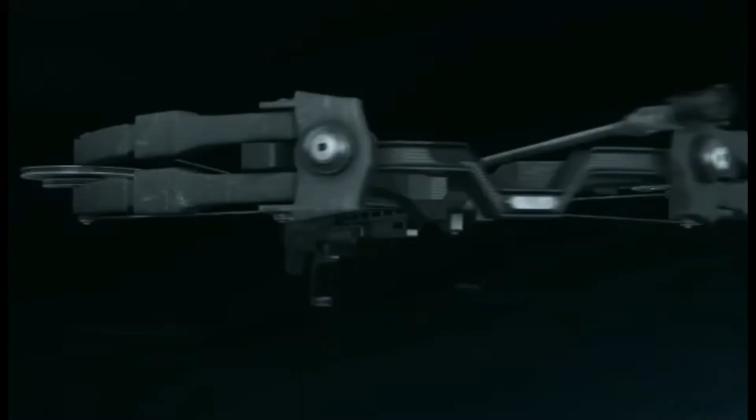In this tutorial we are going to be generating the NC codes required for VMS project 10. The programming has already been done, so we are going to go through each of these operations, beginning with the machine definition. We are using a TITAN-86L as CNC controller coordinate system. We got MAC 1 and MAC 2. So MAC 1 is actually at the main spindle and MAC 2 is at the back spindle.

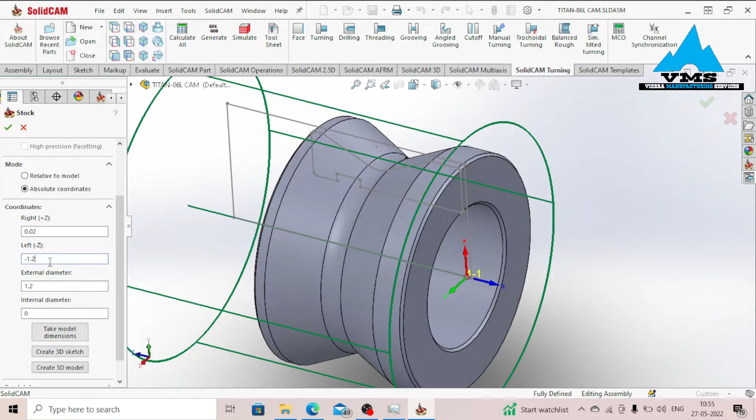Stock definition. Of course, adding some extra material of 0.02 for the facing at the main spindle and equally some extra material required for clamping. We go for the green check. Target. As our target, we are taking the 3D model. Go for the green check.

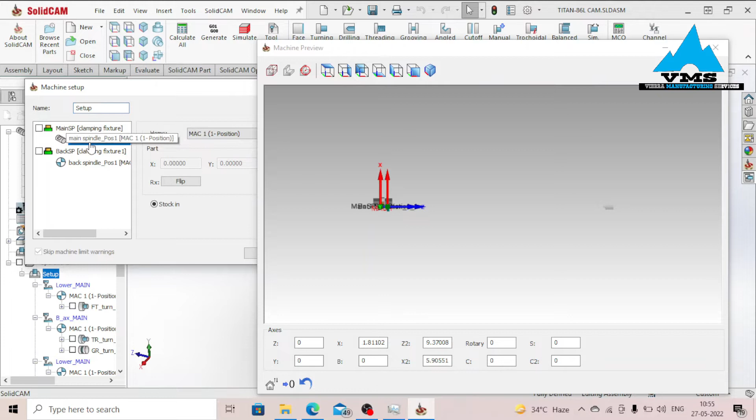So, looking upon the setup, edit setup, machine preview, by selecting main spindle. Now, we are at the main spindle. So currently the jaw is properly seated. I like this position. In case your jaw is not properly seated, you want to make sure that you actually highlight this Z-axis. By using the mouse wheel, you just want to move it up and down in order to get the correct location of your jaw. So I'm pretty good with this.

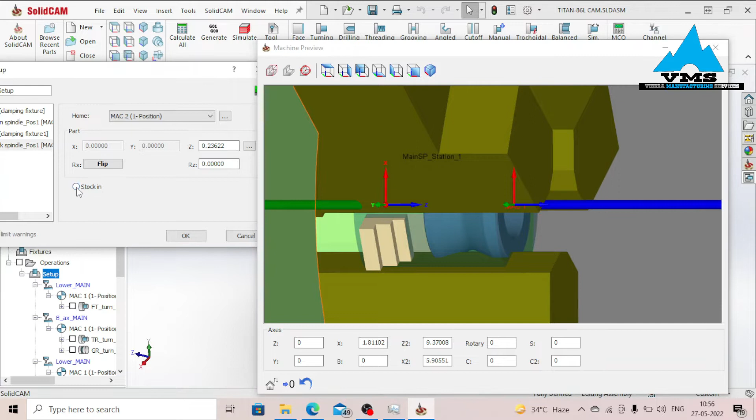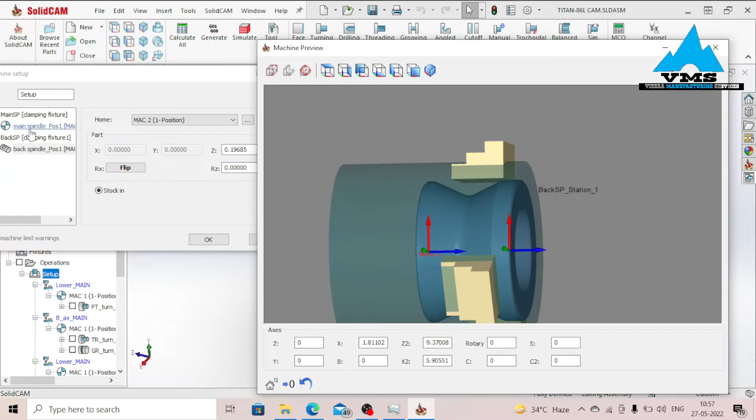Going to the back spindle, select in stock such that the part is going to leave the main spindle and go to the back spindle. Now, going to the back spindle, you just want to highlight Z and move it upward, downward until the jaw actually sits on the part correctly. So I'm pretty good with this. Now, currently the part is in the sub spindle. I do not want to start my operations with the back spindle, so I will just come back under main spindle, making sure that stock should be selected over here, and I go for the green check.

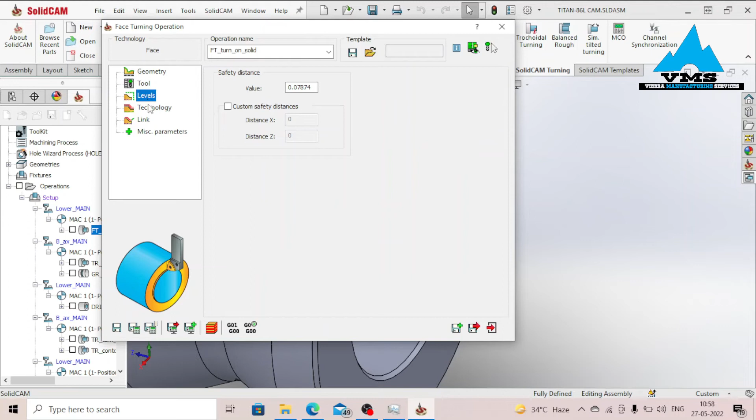Looking at the operation, starting with facing operation for the main spindle, edit operation, show geometry. So we are always selecting this line or this face. Tool. I am using an external cutting tool of angle 35 degrees for my facing. Levels, always safety distance. Technology, I am using a roughing pass and a finishing pass. Looking at the simulation.

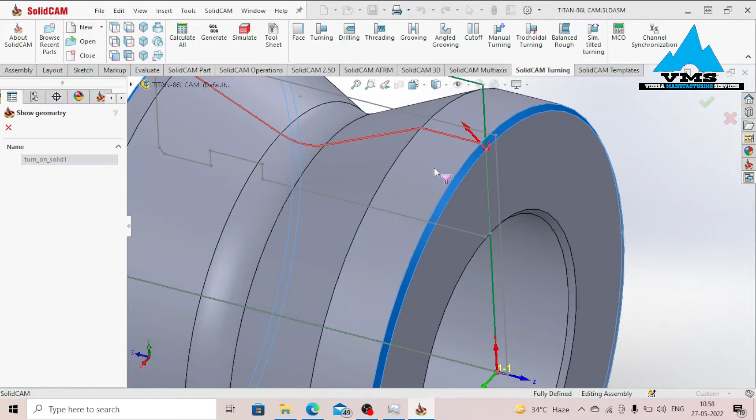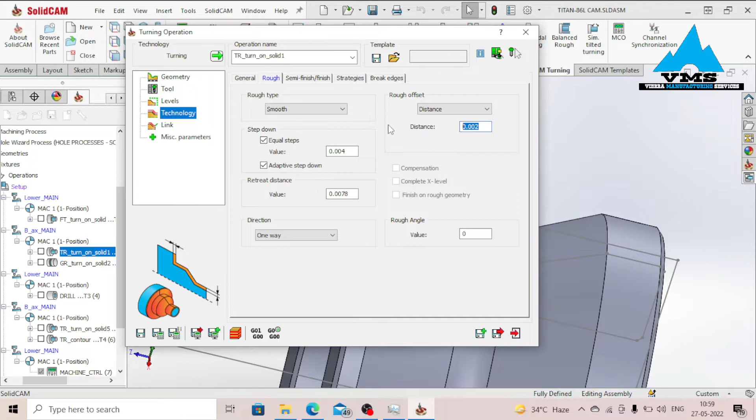So the next operation we want to make is turning operation. Edit, geometry, show. So we are actually turning from the chamfer to the other end of the part. So we are turning the whole part. Tool. I am equally using an external cutting tool, but this time around of 60 degrees. Go for the green check. Technology. I'm using a roughing pass with a semi-finish and a strategy of non-descending. Go for the simulation.

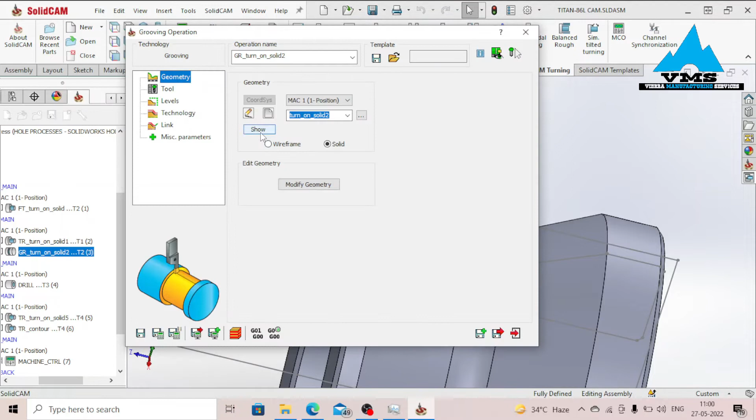Now, the next operation is about this groove over here. Groove operation. Show geometry. For the groove, we begin from this point to this point. As tool, I'm using a groove tool. Levels all fine, technology. Roughing pass and equally a finishing pass. Looking at the simulation.

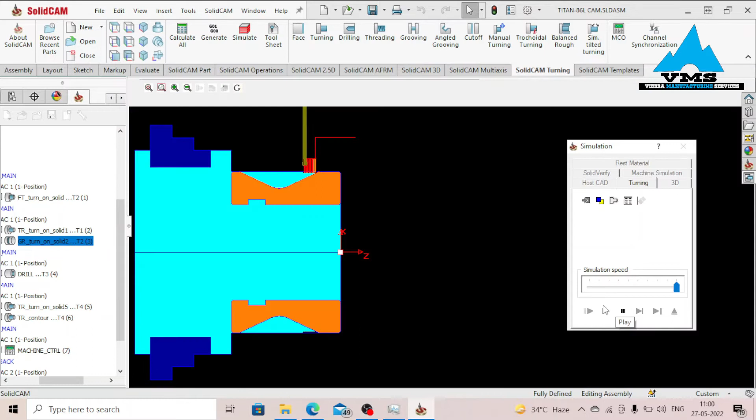Grooving operation done. As next operation, we are going to be making drilling operation for this portion. Now, looking upon our hole, we got a hole of 0.56 inch. So we are going to be using a drilling tool of 0.5 inch. The 0.06 inch remaining, we are going to be using a boring tool in order to make a proper hole finishing. Looking at the drilling operation,

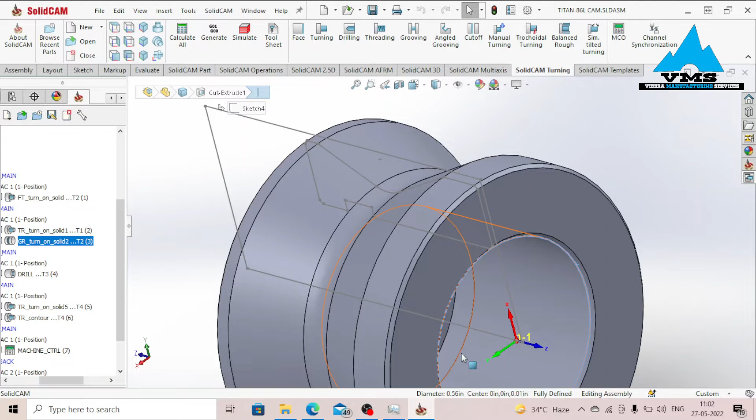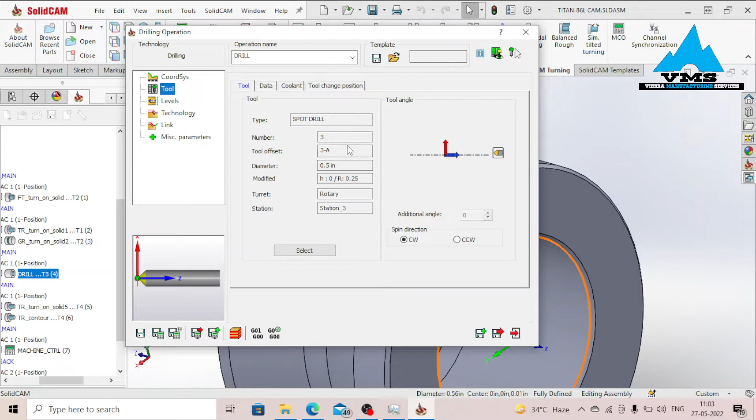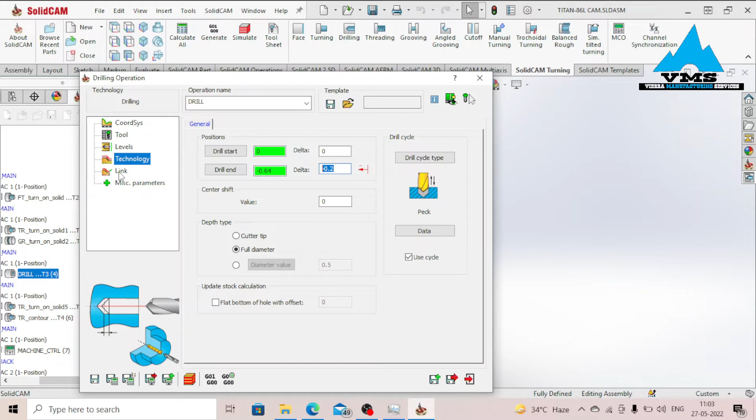coordinate system, we have no coordinate system. Remember that when we are dealing with turning operation or mill-turn operation, we do not define coordinate system for holes because the hole is already at the center. Tool selection, we are using a spot drill of diameter 0.5 inch. Levels, no level. Technology, starting point. Starting point should be this and the drilling end should be this, all through the path with the delta value of minus 0.2. All fine. Looking at the simulation,

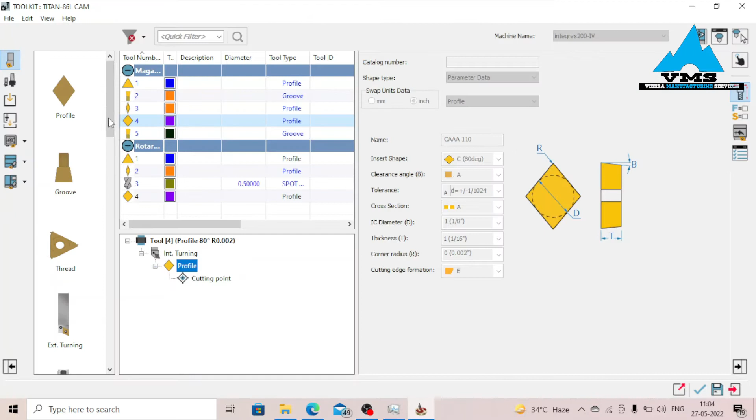for this rest material, we are actually going to be using boring operation. Looking at the geometry, we actually select the inner hole, this line. Tool. We use a boring tool. The boring tool in this case is simply an internal turning tool. Go for the green check, levels, fine, technology. You want to make sure that with mode, you are actually using long internal, roughing pass, and of course a finishing pass with compensation on. Strategy, non-descending. Go for the simulation.

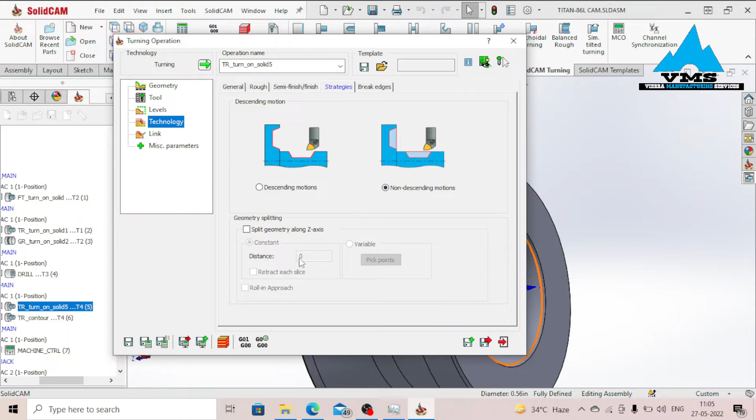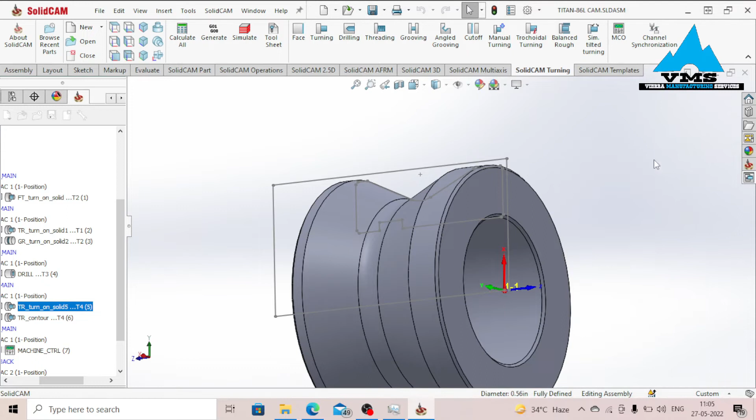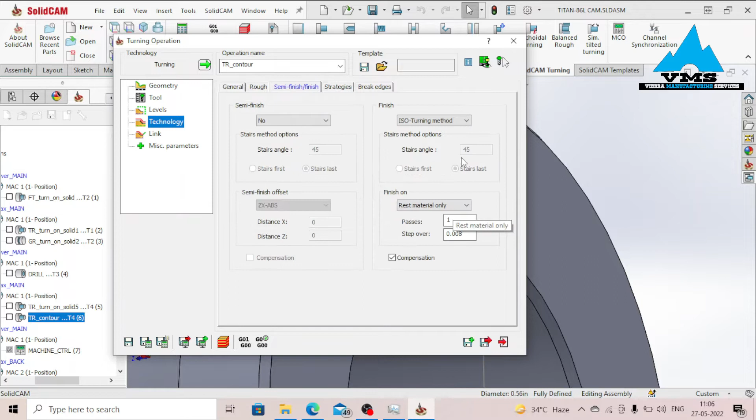So we got this chamfer. If you see, this has not been machined, so we got this chamfer to machine, and now we equally got this hole. I'll be doing this hole when I'll be working with the back spindle. Go for chamfer operation, geometry, show geometry. So we got this edge as our geometry. Tool, the same boring tool, levels all fine, technology, descending should be activated, a roughing pass and a finishing pass. Go for the simulation, chamfer done.

At this point, we are actually done with all our operations on the main spindle. In order to work with the sub spindle, we have to make a part transfer from the main spindle to the sub spindle. Looking at our MCO, edit, machine preview. Looking at the operations in the MCO, first operation, we have the rotatory. This rotatory is actually our sub 2 turret. Since our aim is actually to move the sub spindle to the main spindle, the sub 2 turret and the main 2 turret are out of the way to avoid any collision.

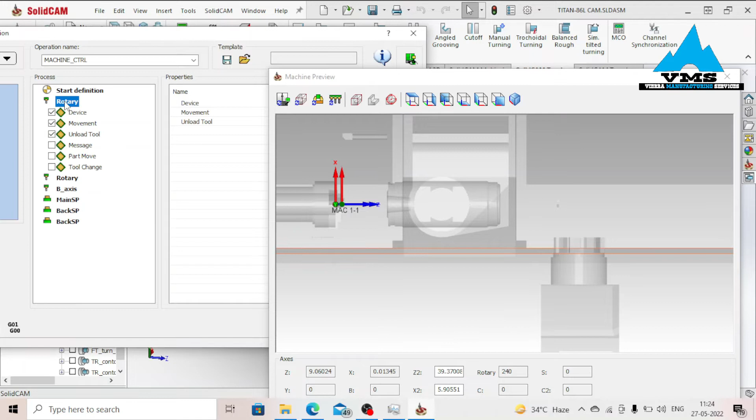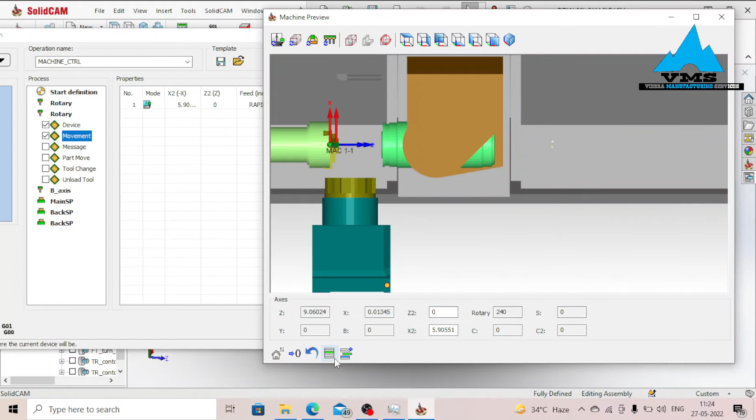Looking upon the rotatory movement, so the sub 2 turret back to home position. Next operation, movement. We are actually telling the sub 2 turret to move out of the way. For this, you just have to come under Z and move it all through with your mouse. Move this way and notice that the most safety position is 0. So when you are done identifying that, you just come under paste axis value and you insert.

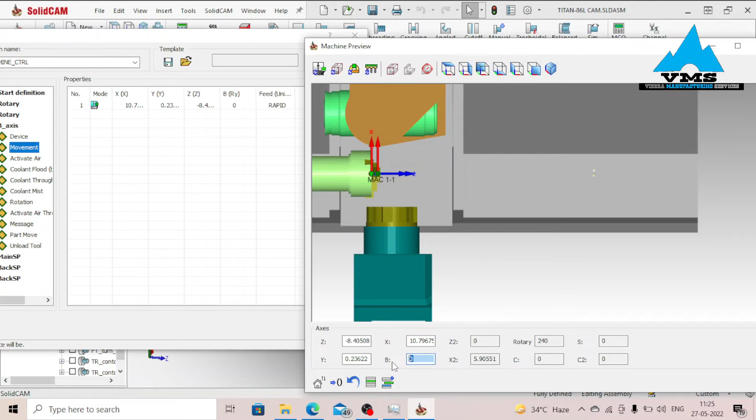Now, this is actually the main 2 turret. So you equally want to move the main 2 turret out of the way. Movement. Now, by taking a rotation value, you just come under this one, B. The rotation value can either be 0, 90, or equally minus 90. So currently, when I take a rotation of 90, you notice that the tool will actually make a collision with the incoming sub spindle. So 0 is actually the right direction for this, and you just insert paste.

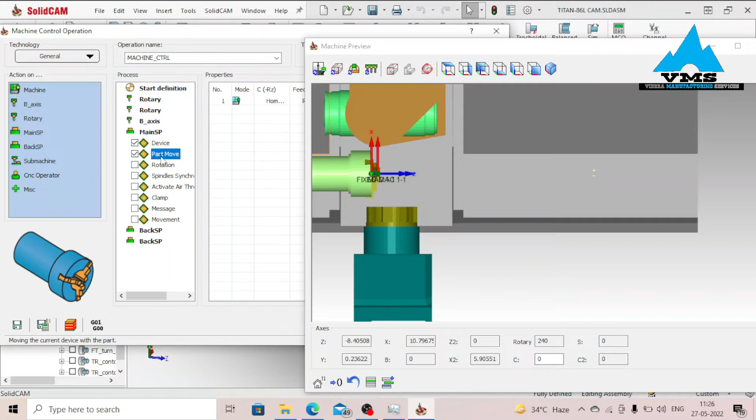The main spindle. Since the main spindle is actually holding the workpiece, we do not use a movement but rather a part transfer. Part transfer, home position. So I am just telling the main spindle to go to home position. Back spindle, movement, home position. Then I have to tell the back spindle to move closer to my main spindle.

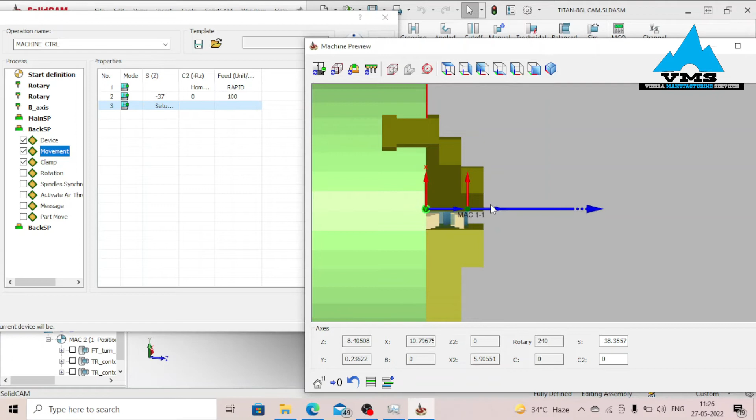So this is Z. Looking at Z over here. So as you notice, just with the mouse, I can actually move it within the distance I wish. So it should not be touching the main spindle. This is wrong. You have to go a little bit backward. This is fine. And then paste axis value. Okay, fine. Next thing you want to do is come downward and select stock lock. Look what happens. The back spindle locks on the part.

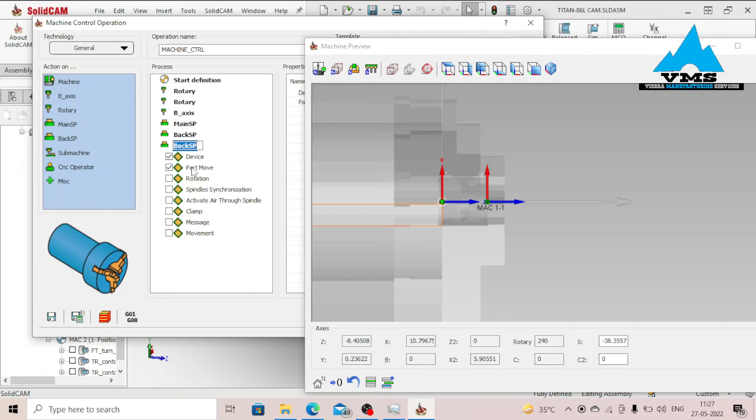Then for the next operation, clamping, you want to select close on stock. This means that the sub spindle closes and the main spindle opens. We are done with this. You just want to drag and add this new operation. Since the back spindle is currently holding the workpiece, you do not use movement but rather you use part transfer. So we simply tell the back spindle to go back to home position. At this timing point, you just want to save, calculate. So with this, we are done with the MCO. We can now perform all the operations required on the sub spindle.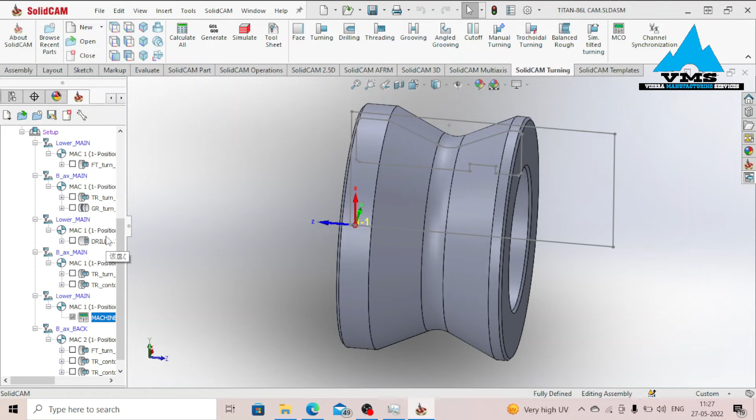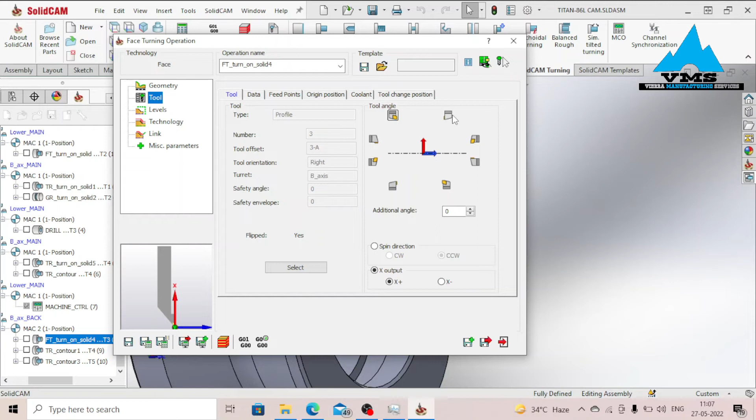Looking upon our back spindle operations, first operation facing, geometry. So we are taking this line or simply this face. Tool, I am using an external cutting tool of angle 35 degrees. Now, making sure that you are not working with this direction but rather with this back side. Levels, technology, roughing pass and a finishing pass. Looking at the simulation.

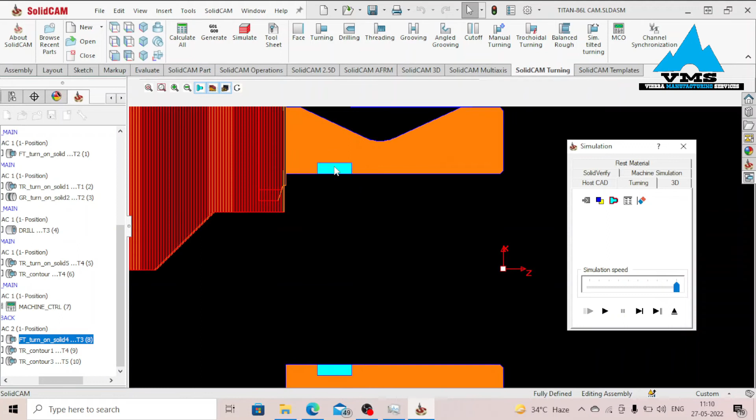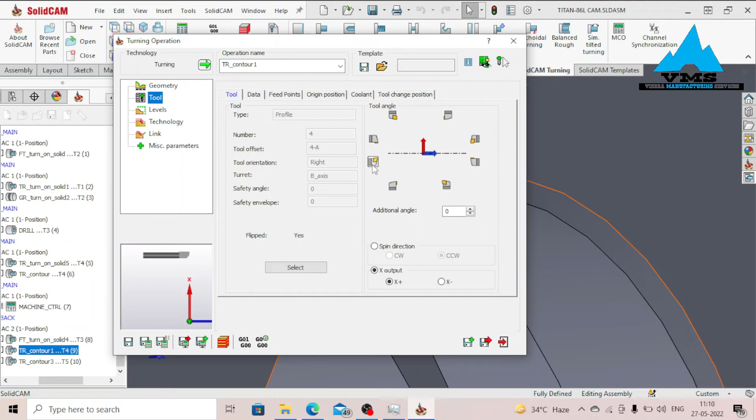Facing operation done. Now, for our next operation, we want to make this chamfer at this edge and then complete this cut out of this hole. Edit, geometry, show geometry. The chamfer edge is our geometry. Tool. For our tool, we are using the same internal turning tool or the same boring tool, making sure that you are taking this direction as your cutting direction. Technology, long internal should be selected, strategy, descending. Roughing pass activated and surface finishing. Looking at the simulation, chamfer done.

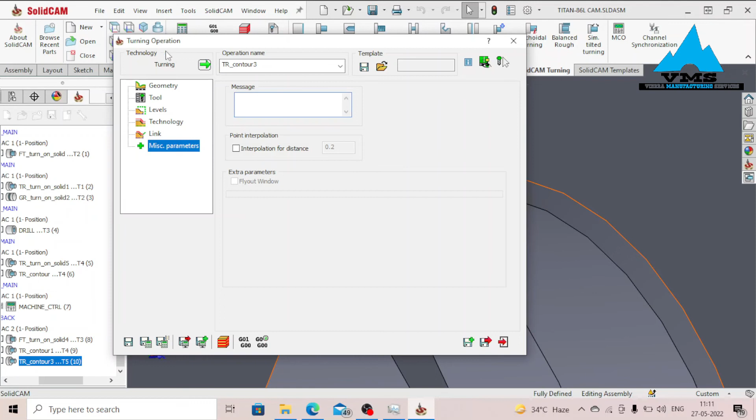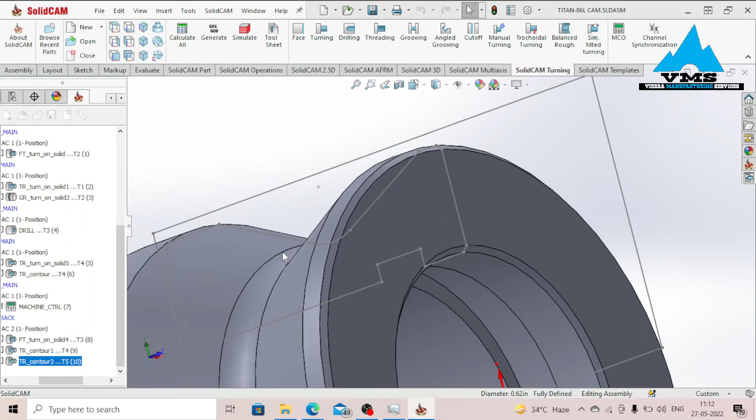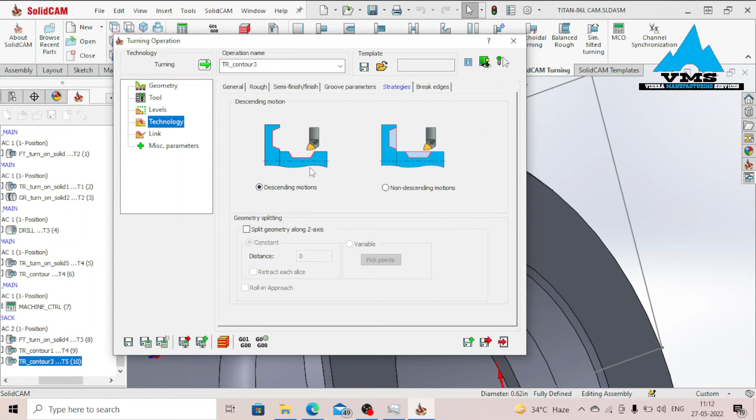Looking at this, using turning operation, geometry, show geometry, and the exact geometry we are taking is this cut out or simply this line. Tool, we are using a grooving tool, a very small groove tool. Looking at the groove parameter, we got a groove tool of A, 0.0157, and a groove width of 0.0039. Go for the OK. Levels, technology, long internal, with a roughing pass and a finishing pass with compensation on. Strategy, link. Now, I will just select none for now and save calculate.

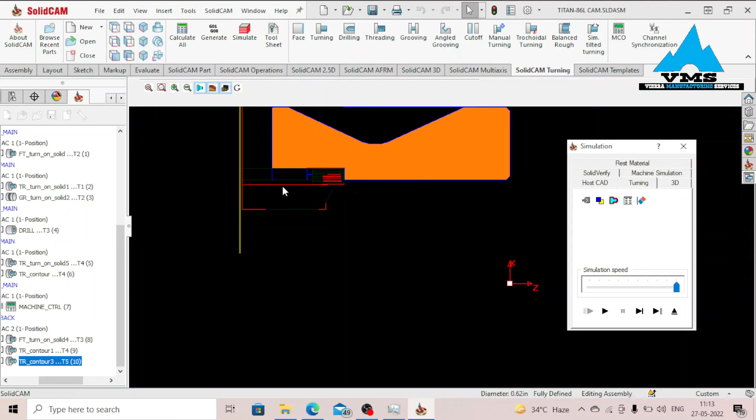Simulate. Okay, so you see what happens. It actually machined the part we want, but since the tool is going back to home position, it machined an extra part we do not want to machine. Now, in order to resolve this, you have to use this link, taking normal, save calculate. So rather than returning back to home position in a straight line, it actually follows the path of a curve. So this is the use of a link. The link makes the tool follow the path of a curve when it is returning back to home position.

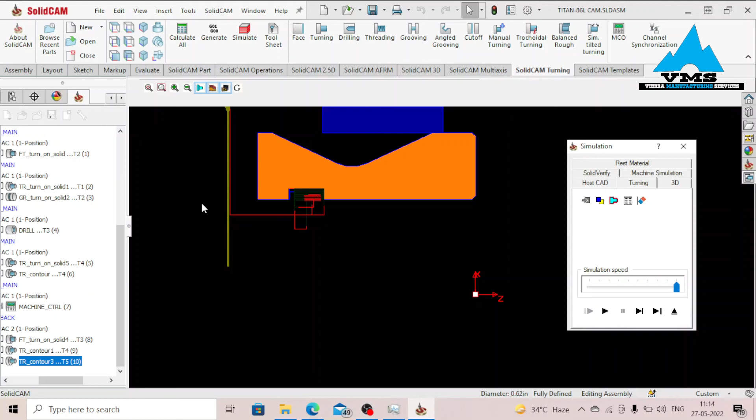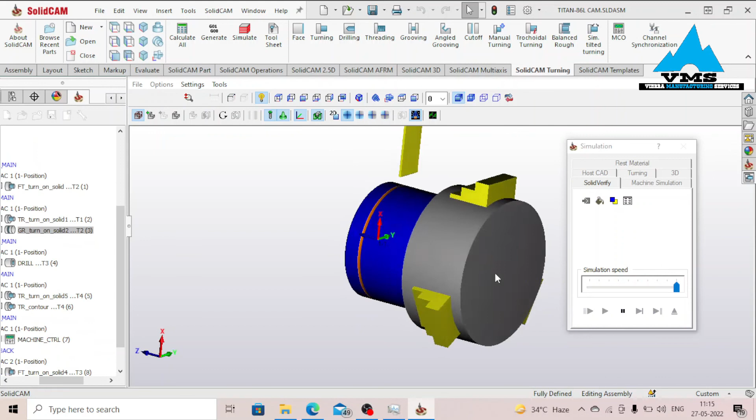All operations have been done on the main spindle, a part transfer has been done, and all the operations have been done on the sub spindle. So we actually have to synchronize the main spindle and the back spindle. For this, make sure that you select operations, come under channel synchronization, and simply save. Looking at the full simulation, simulate, solid verify. Rest material. All fine, project totally done. With this, we are done with VMS project 10.

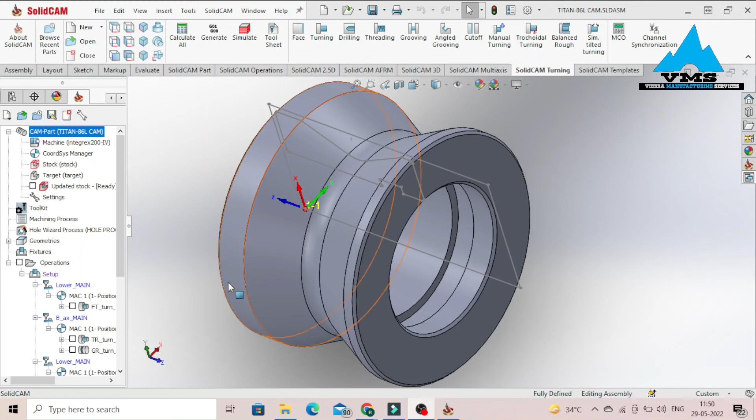In the next tutorial, we are going to be generating the M and G code required for VMS project 10.